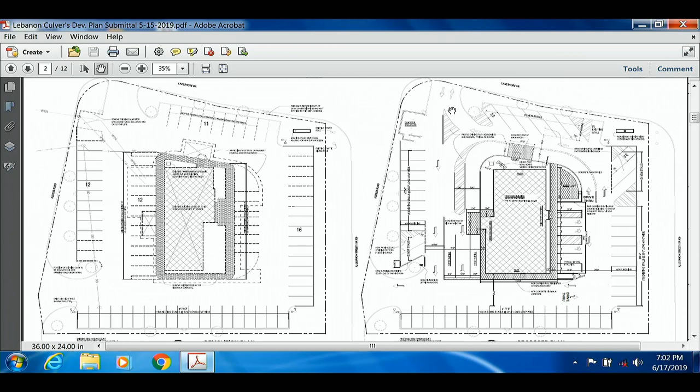This is for the Culver's Restaurant. This is a development plan application. They're at 2454 North Lebanon Street, which is the former Bob Evans Restaurant. I'll walk through exactly what they're doing with the site here in a second. They have brought their plans forward, and they went to the Board of Zoning Appeals a couple of weeks ago.

They had a handful of variances they needed to request. Half of those variances were because they're essentially reusing the existing site. So if they pull up the screen, you can see here that on the left is the existing site with the existing building footprint, and on the right is some of the changes they're going to be making.

So they did an evaluation of the site over the last few months, looking at whether they could remodel and reuse the existing structure, the Bob Evans structure, or whether they were going to need to scrape that building off the site and just rebuild a new Culver's Restaurant on that site that is exactly the floor plan they need.

What they ended up deciding is, even though it was going to cost a little bit more, that it made more sense for them to just go ahead and scrape that existing structure off the site and build a new building. With that, they're also primarily going to be reusing the existing parking lot with a few modifications. The biggest one being that they have to add a drive-through lane and drive-through window where there isn't one now.

So the existing edge of the parking lot will remain the same. You can see here the drive-through kiosk is on the north side, the drive-through window is on the west side. So you'll enter the site, go around the building, wait in line on the north side, and then come around and pick up your food on the west side of the building.

Because of adding that drive-through lane, it got a little bit narrower through that site. So what they needed to do is, in some places where the drive-through lane is located, make it a one-way drive aisle, so you've got some angled parking as opposed to the perpendicular parking you see here. So they've changed those to angle, and they've also moved their dumpster location a little bit from where it was before and putting a new enclosure in. So there's been a few changes the way the parking lot will work from two-way to one-way to account for that drive-through lane.

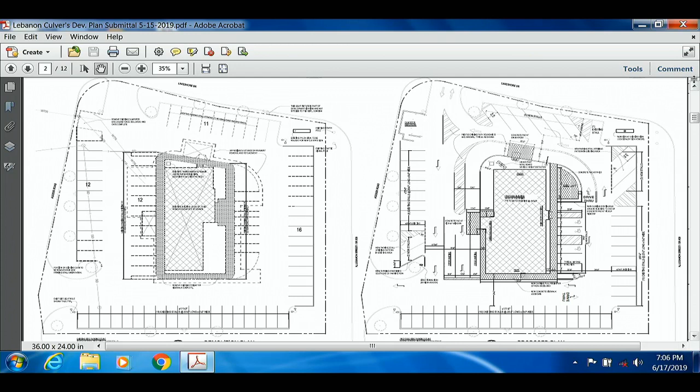The final one was the sign type. If you're familiar with the site, you'll know Bob Evans currently has a pylon sign out there, represented in this image. I'll zoom in a little so you can see better. You can see here the Bob Evans sign. What they're essentially doing is reusing the structure and replacing it with a Culver's sign.

They indicated this was a hot point with Culver's corporate, having a larger pylon type sign out here. The franchise owner has done a number of Culver's in this area and has a good relationship with Culver's corporate. Talking with them about the Lebanon market, they felt it was very important to have a larger sign like this out on the site, and that was part of the requirements of corporate approval for this franchise.

So we did discuss that with the Board of Zoning Appeals, and they did approve a variance to allow for this pylon type sign out here.

Ben, do you recall how much larger that was than our standard? So we allow 32 square feet for a ground sign. If you consider this a pole sign or pylon sign, they're allowed up to 200 square feet. So that's why they got a variance to allow a pole sign.

So they are under, obviously, 200 square feet. They've got about 65 square feet out there in the sign right now, between the static Culver's oval sign and where it says chocolate covered strawberry - that's their digital sign that changes daily with their flavor of the day, for those familiar with Culver's. So it's not a digital sign constantly changing, just about every 24 hours for their flavor of the day, and that's all that will be displayed.

But that's already been approved by the BZA, correct? The BZA did approve that. Okay.

So those are the variances, and then just to go over the site generally, let's go back to the landscape plan. Well, here we'll start with the elevations.

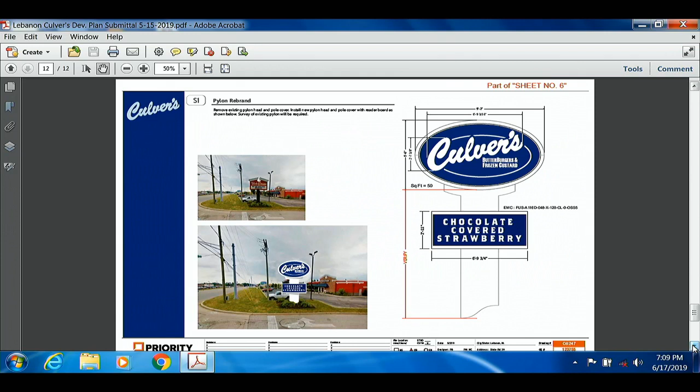The building does meet all the required architectural standards. Let's go to the next one. Whoops, that's the signs. Let's go back to the better elevations a little bit earlier in the packet.

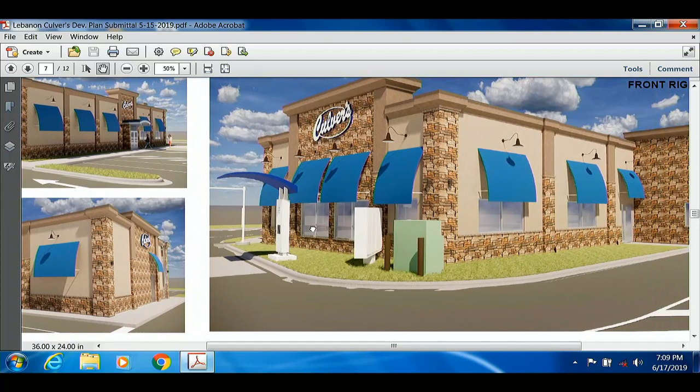Here we go. This gives you a little bit better idea of what this building is going to look like. It does meet all of our architectural requirements, including the 50% masonry requirement. This will give you an idea of what that building is going to look like. Very attractive building, meets all of our requirements.

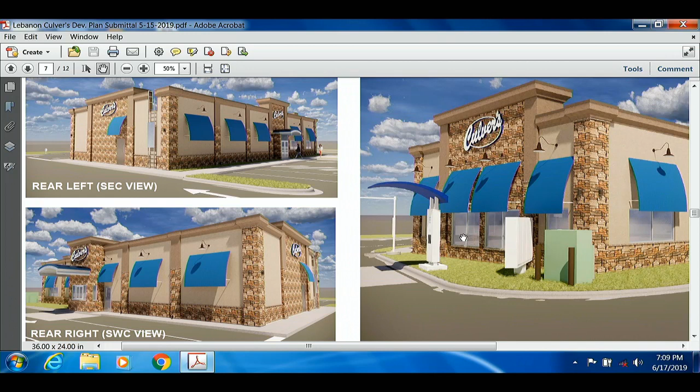So they have done the 360-degree architecture as we require. You can see here, this is the north side of the building where the order window is. This is the drive-through window, which would be on the west side of the building. This kind of gives you an idea of what would be the east side of the building on this frontage, and the south side here.

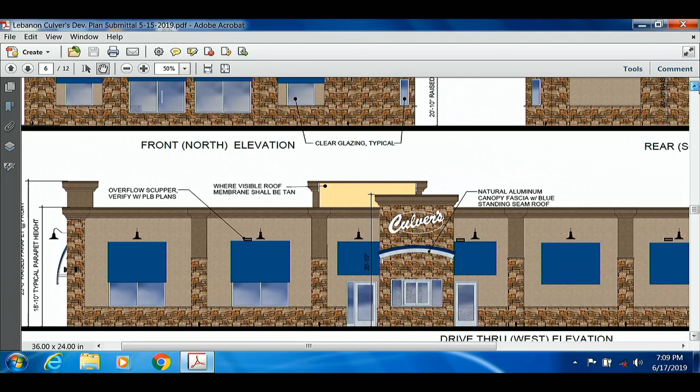In terms of landscaping, other than the corridor buffer and the lot plantings, they have met all of our landscaping requirements, which represents a significant additional amount of landscaping than what's there now. I think there's maybe a couple, three trees on this lot right now and very little in the way of shrubs.

So pretty excited about the improvements that they were able to make to the site in addition to the building that they're going to provide.

Outside of that, they're essentially using the existing parking lot. They will have to resurface or repave areas that are damaged. I know that comments were made at TAC.

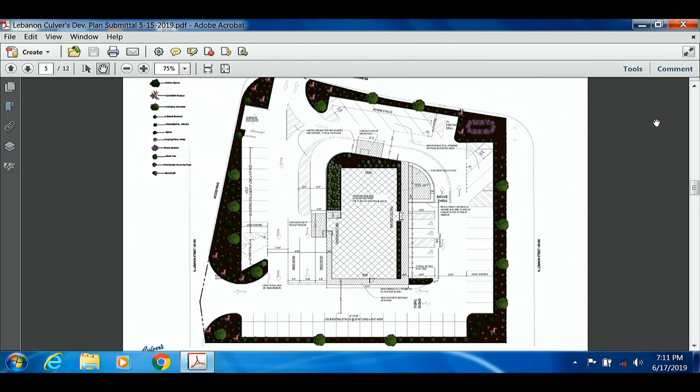The other thing you do not see here that was commented on at TAC is that they hadn't provided for a sidewalk along Lebanon Street in their plans. But that comment has been made to them, so they are aware, and they will have to update those plans accordingly before we'd approve any building permits. So those are the two major comments that came out of TAC. Most everything else was minor because they're reusing the existing site.

I'll see if I've missed anything. I did not mention the parking requirements, but they have met all of our parking requirements for this type of use, providing a total of 55 spaces. And I think that kind of hits the highlights of the development plan application.

The applicant is not here tonight, but I understand that they would anticipate completing their building construction plans fairly quickly once they get all these approvals in place, the last one being tonight, and starting construction as soon as possible. Because this is not a full site development, really just a building construction, it will be fairly quick and should be ready to open later this year. We'll get a better idea of the schedule once they complete their construction plans and get their state approvals.

So I think that's all I have. I'd be happy to answer any questions or comments you might have. Questions for Ben?

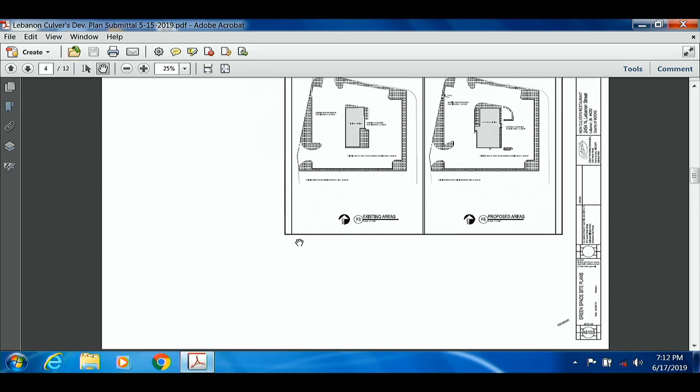No? Okay, so this is a public hearing, so I will open it up for any and all to step forward and express their comments or concerns. Don't everybody rush at once. Seeing as how no one is stepping forward, I'll close the public portion of the meeting.

And again, ask the commission if there are any questions or comments for Ben. And I can assure you, we did send out public notices for this, so it's not why the room's empty. Great. Seeing as how there's no questions for Ben,

We would entertain a motion. I'll motion that we approve docket 19-17 for the development plan as presented, provided that the applicant does adequately address all the City of Lebanon TAC comments prior to the application for any building permits or site improvements.

I'll second. We have a motion and a second. Kelly? Matt Reynolds, Yes. Ashley Paddock, Yes. Kevin Krulik, Yes. Keith Campbell, Yes. Gordon Perry, Yes. Jane Taylor, Yes. Lori Gross, Yes. It passes.